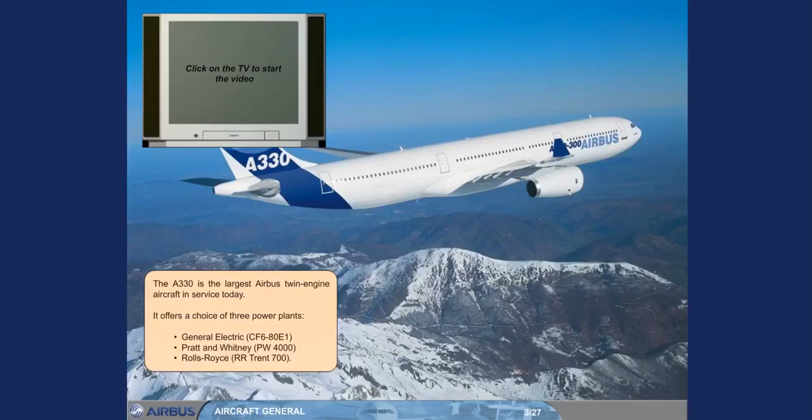With a maximum takeoff weight of 230,000 kilograms, 507,040 pounds, the range of the A330-200 is 6,400 nautical miles.

With a maximum takeoff weight of 217,000 kilograms, 478,400 pounds, the range of the A330-300 is 4,900 nautical miles. Note: for the customized values, please refer to your airline documentation.

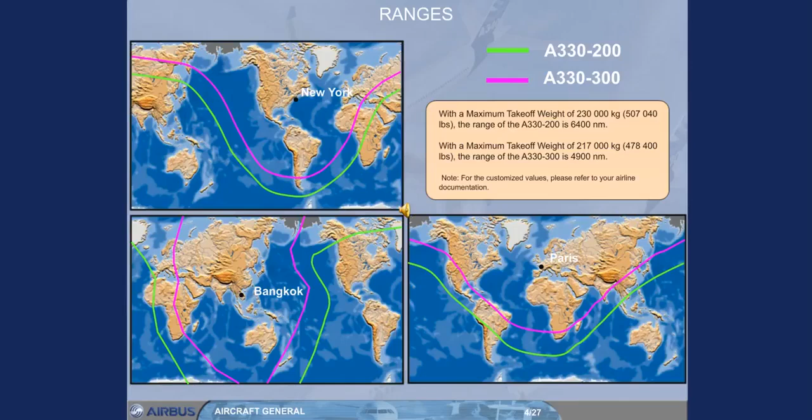The layout for passenger seating may change according to the operating requirements, but the cabin is equipped with a certified maximum of 375 seats for the A330-200, 440 seats for the A330-300.

Between the two aircraft, the wing span has not changed, whereas the A330-200 length has decreased and its height has increased.

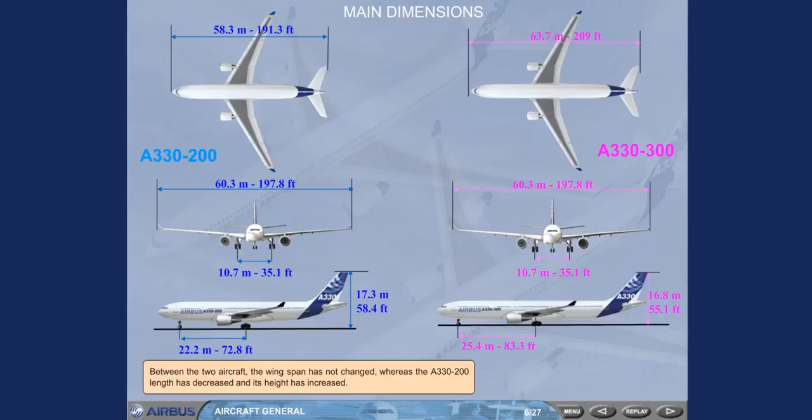The following areas are unpressurized: the tail cone, the main gear bay, the nose gear bay, and the radome.

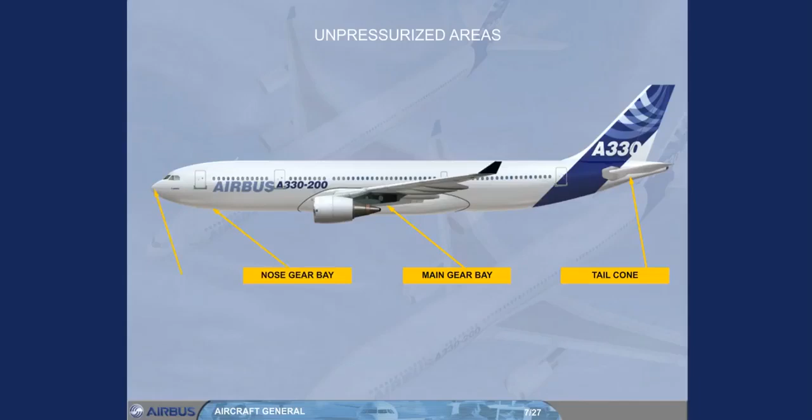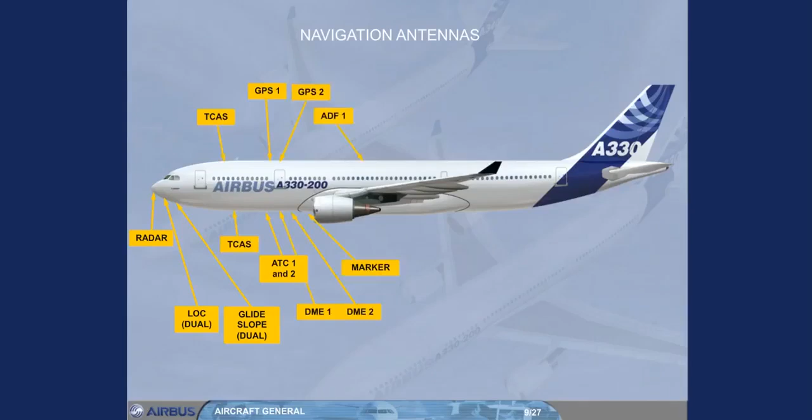Let's now have an overview of the location of the navigation antennas: Radar, localizer and glide slope, ATC 1 and 2, DME 1 and 2, GPS 1 and 2, marker, TCAS, ADF 1 and 2, radio altimeter 1 and 2, and VOR.

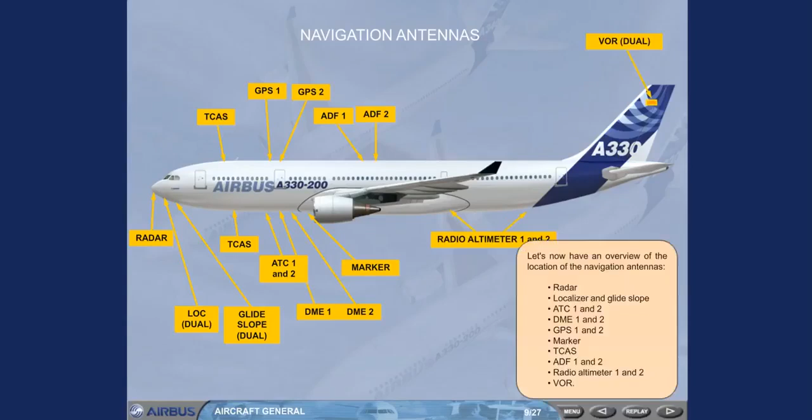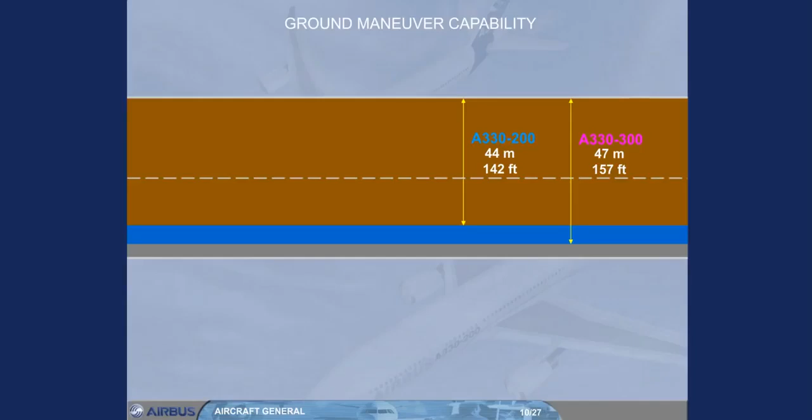The minimum pavement width for a 180 degrees turn with symmetric thrust and no braking is 44 meters, 142 feet for the A330-200, 47 meters, 157 feet for the A330-300, based on maximum steering limit of 72 degrees.

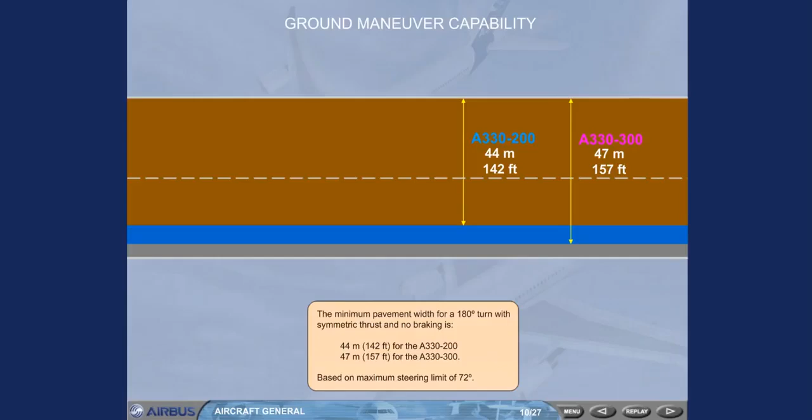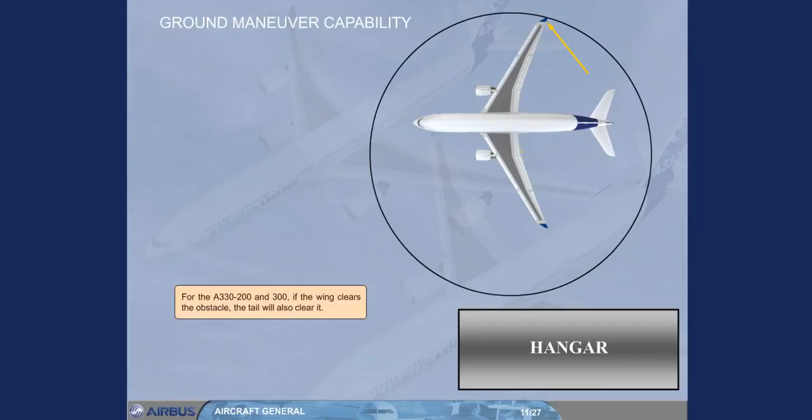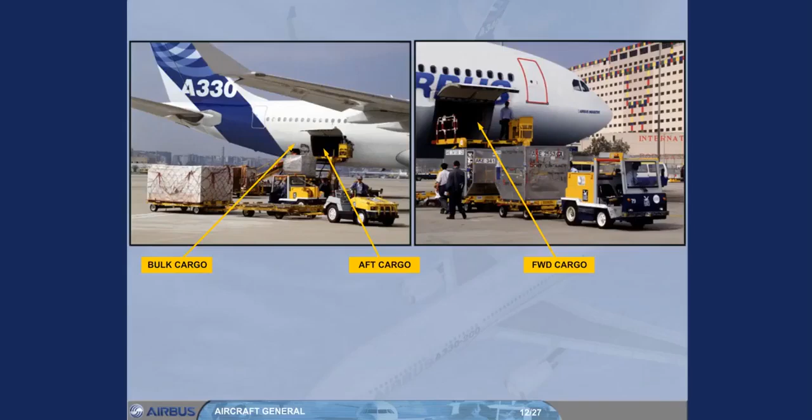There are 3 cargo compartments: a forward cargo compartment, an aft cargo compartment, and a bulk cargo compartment. The size of the fuselage accommodates standard containers.

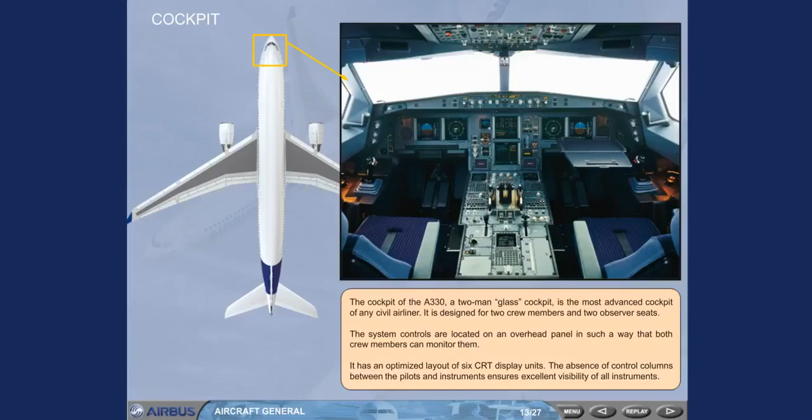The pilot's seats are electrically or manually adjustable. All the seat adjustments will be presented during the simulator session.

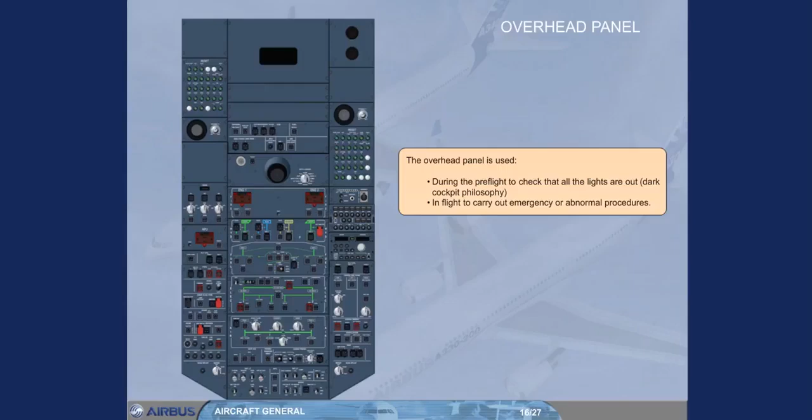Click on the overhead panel area to display it. The overhead panel is used during the pre-flight to check that all the lights are out, dark cockpit philosophy, and in-flight to carry out emergency or abnormal procedures.

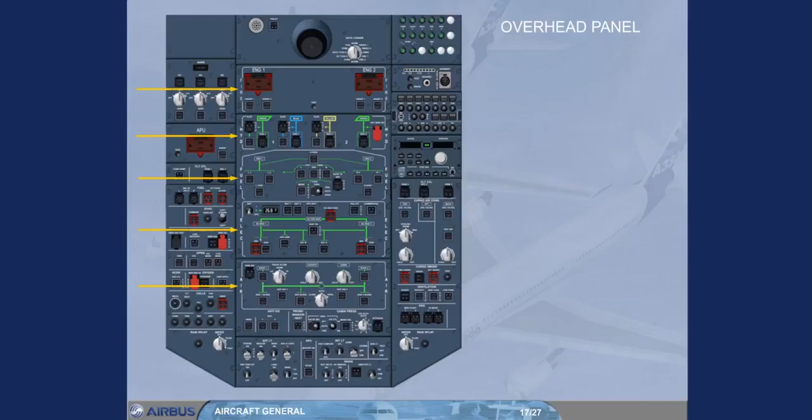The central part of the overhead panel is dedicated to aircraft systems such as air conditioning, electrical, fuel, hydraulic, and fire. Note, the most frequently used controls are located on the bottom part.

For a closer look, let's select the fuel panel. On the left and right sides is the system name. For each system, there is a schematic diagram. Notice all push buttons are in the Lights Out configuration. Click on the forward arrow to return to the cockpit.

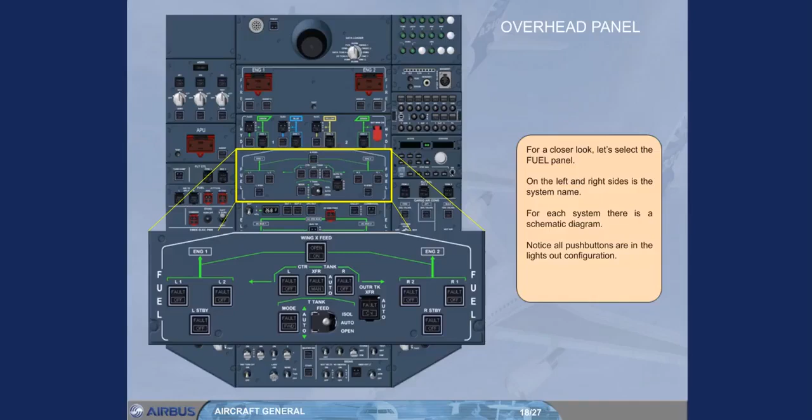Click on the glare shield area to display it. The glare shield is used by the pilots for flight guidance and short-term flight management. It is also used to control the electronic flight instruments. Click on the forward arrow to return to the cockpit.

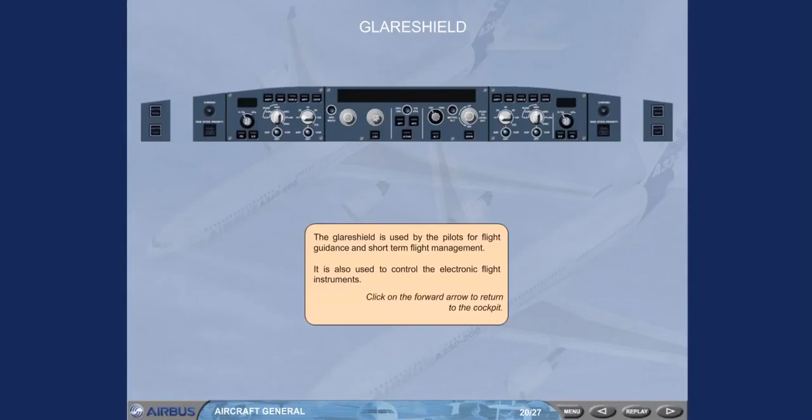Click on the Instruments panel area to display it. The Instruments panel provides the following information to the pilots: flight information through the Electronic Flight Instrument System, EFIS, and standby instruments, system information through Electronic Centralized Aircraft Monitoring, ECAM. Click on the forward arrow to return to the cockpit.

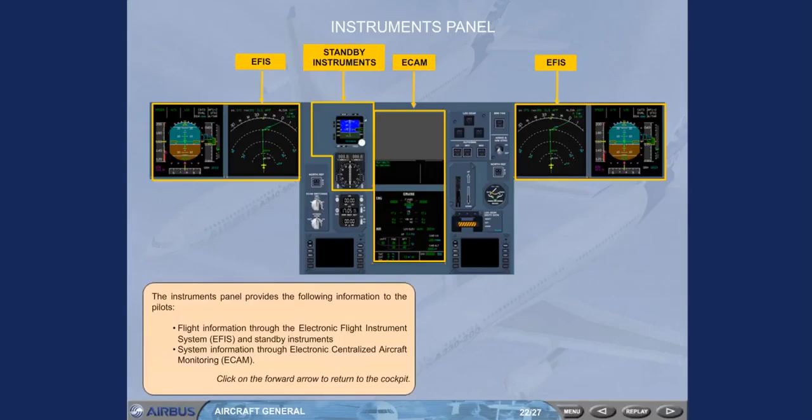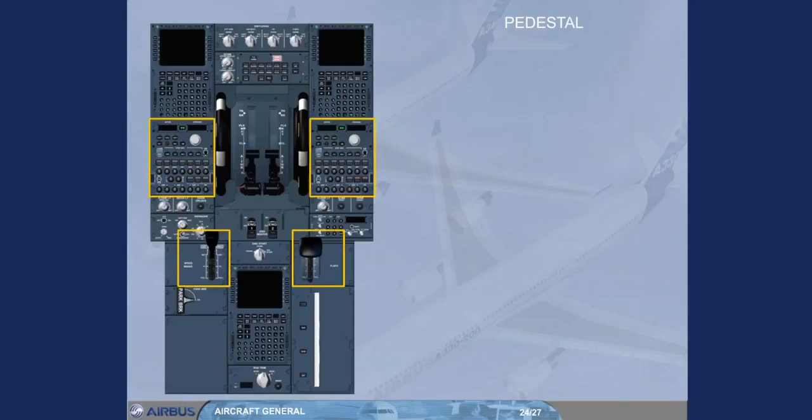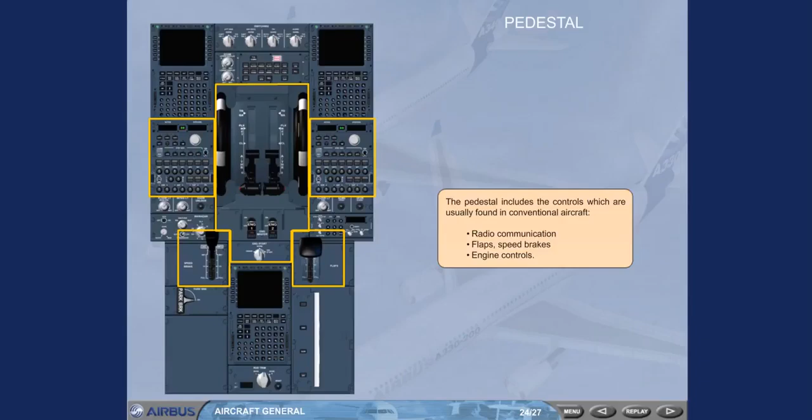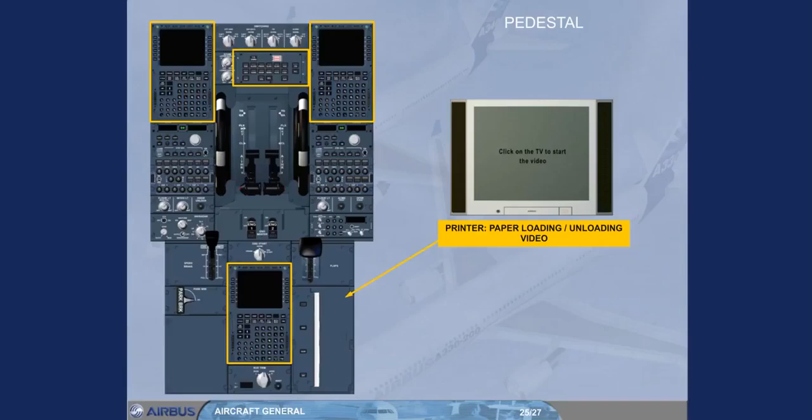Click on the pedestal panel area to display it. The pedestal includes the controls which are usually found in conventional aircraft: radio communication, flaps, speed brakes, engine controls. It also includes the ECAM control panel, the multipurpose control display units, MCDU, which are the long-term interface with the flight management and guidance system. Click on the forward arrow to return to the cockpit.

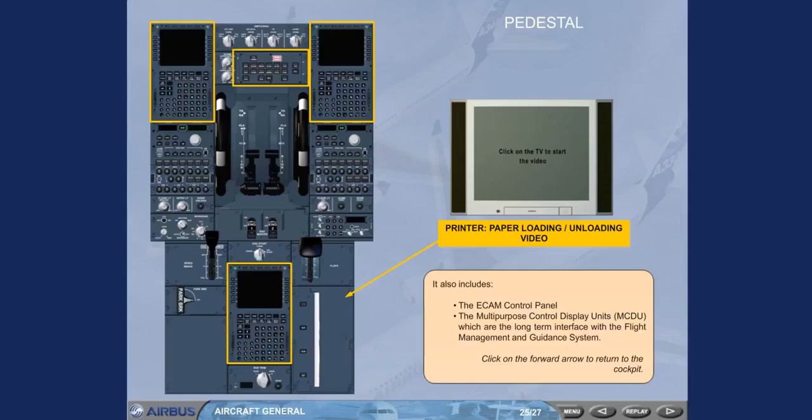Finally, click on either side stick area to display them. The aircraft is flown manually using either side stick. They are located on the left and right sides of the cockpit.